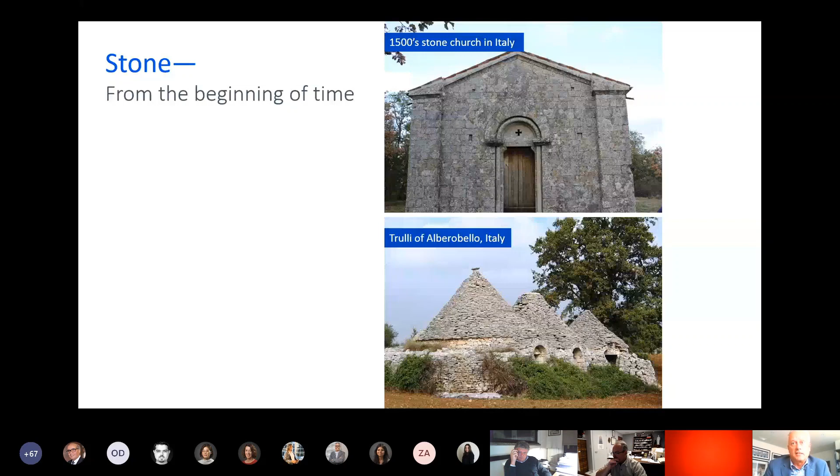With the advent of technology now and CNC and robotics, architects can get a lot more creative with the use of stone as a facade, where it's now, rather than just a building material, it becomes just a decoration on the facade and the main line of defense for weather in mostly rain screen principles now.

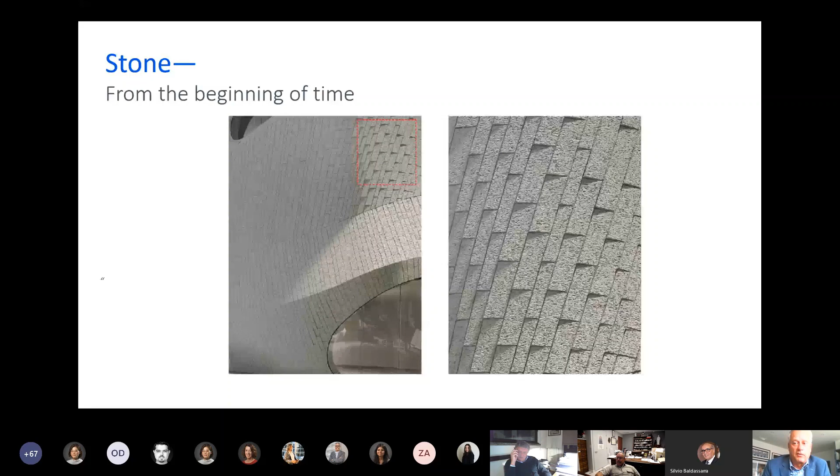So just the way things have changed over time and evolved, and later on we can even get into some of the technology changes with Roberto and Brett and how that's really changed the industry with time. So today, as I mentioned, Brett Rugo is the founder of Rugo Stone, and we've worked on many projects with them. Roberto Canali is a quarry owner and fabricator in Italy, and again, we've crossed paths on many projects over the years, so I'm really glad that they were able to join us today.

A little bit about me. I've been in the stone industry pretty much all my life. I graduated as an engineer, and my first job was with a structural engineer, but we were servicing stone contractors. I then got hired by one of the stone contractors as their in-house engineer, and since then have been engaged and love the industry and have touched many points of it, and feel very fortunate to have worked on some great projects, which I'll share with you today.

Being born and raised in Toronto, I still play hockey, so that's a big part of my life too. A couple of times a week, I put the skates on and go out with the boys and play hockey.

So today, we're going to talk a little bit about design assist and the importance of that, especially on higher profile projects. Cladding types. I'm going to cover topics that I call getting it right the first time, which covers various aspects and approaches. Other things to consider, testing and projects. And throughout the whole presentation, I'm going to be weaving in project examples to talk about the various aspects. So right out of the gate, I think design assist is something that's becoming a lot more prominent.

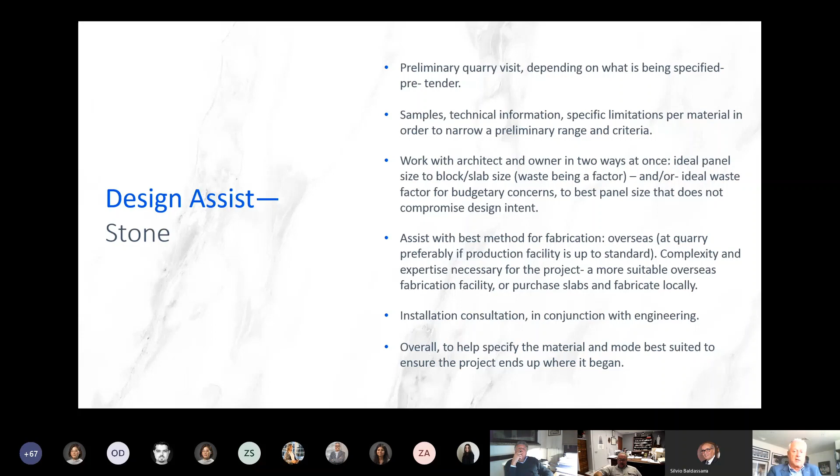It could involve inspections during the fabrication, dry lays, vetting the tickets, fabrication. It could also include shipping, logistics, numbering of stones, making sure the stone is shipped to the site in the sequence that it's required. We have been on projects where we're told the stone's on site. Yeah, the stone's on site, but it might be all the second floor stone. You don't have the first floor stone. So again, understanding all the logistics.

And when you're assembling a team early on, contractors like Brett that have been in it all their life, quarry owners like Roberto, these are all things that automatically come out in the process, but you're not always working with experienced people like that, and some of these things get slipped through. So really assembling a good team at the beginning is extremely important.

What's becoming really popular now is dry lays and digital dry lays, where quarries and fabricators are photo documenting all the slabs that are being produced. And here's an example. You can actually lay out the materials on your elevations and do a digital dry lay. So this would be photographed, develop the elevations on the drawings, cut the pieces, dry lay them, ensure everything's right in the warehouse before shipping and packaging, numbering all the stones appropriately, and shipping out.

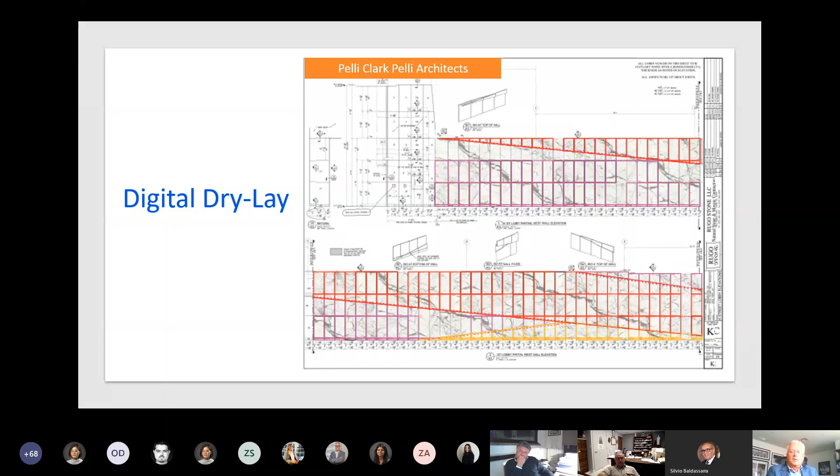So you can see how all that planning, organizing, selecting blocks, selecting the slabs, numbering the slabs sequentially, in order to achieve this goal, needs to be all done up front. And really all the stakeholders need to be part of that process in order to pull it off and execute it properly.

So when I look at stone in the initial stages of a job, really assisting architects in the takeoff, I like to break it up into two categories when we're talking about natural stone. Dimension cut stone, which is really the focus of the presentation today, is custom cut stone shaped and fabricated specifically to go in a location, which requires shop drawings, engineering, shop tickets, most often installed mechanically with anchors. So in other words, we're building a Lego set of drawings, every piece numbered, every piece goes in its specific location.

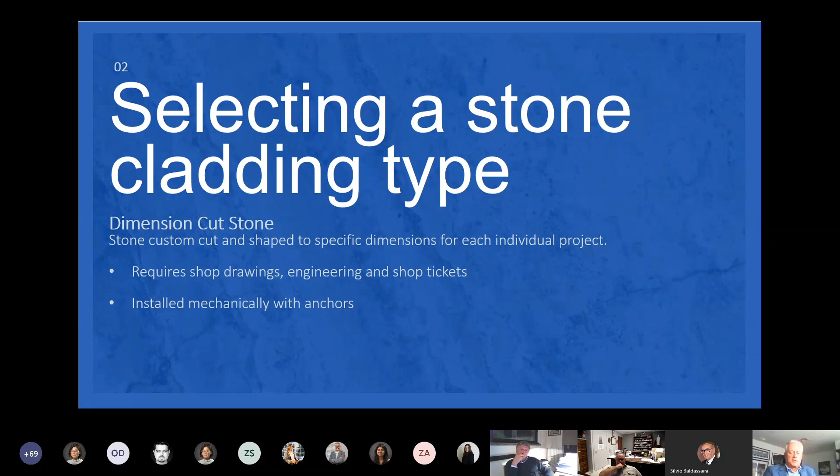Another natural stone type is random ashlar, which is still a natural building material, still used a lot. It typically doesn't require shop drawings. In some cases it may require shop drawings for accent stones or window surrounds, but in most of these cases it's laid up very similar to a masonry type installation or brick laid up in mortar.

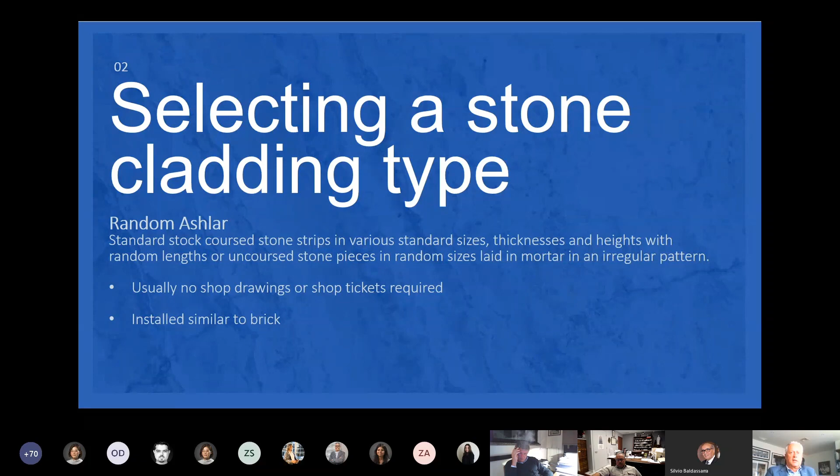Key factors to getting it right the first time. So 5 main things. Material selection obviously is number 1. Structural backup can have a huge impact. Shop drawings, anchor design and anchors. I'm going to go through each one of these individually.

So material selection. First thing, is the material selected suitable for the intended application? Obviously climate plays a big impact. Where is the project? Is it exposed to the elements? What kind of wind loads? Are we dealing with seismic loads? All these factors come into play.

Stone is a natural material. It's not like we can order 35 MPa concrete and we get 35 MPa concrete all the time and we know what we're dealing with. Natural stone is a very variable material. The same natural stone can even vary within a quarry depending on what ledges it's taken from, especially limestones can vary quite a bit in strength. So really, is the material that we're specifying the right material for the application?

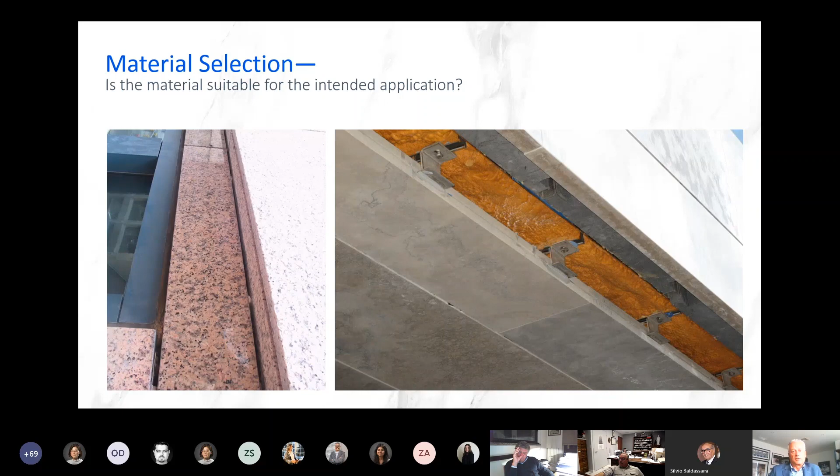I always tell architects there's no bad stone as long as it's used in the right location. There's stones that can be used improperly in exterior cladding or on paving that could have terrible results. But if they're used on an interior or a lobby on an interior facade, perfectly fine. So material selection and suitability, very, very important.

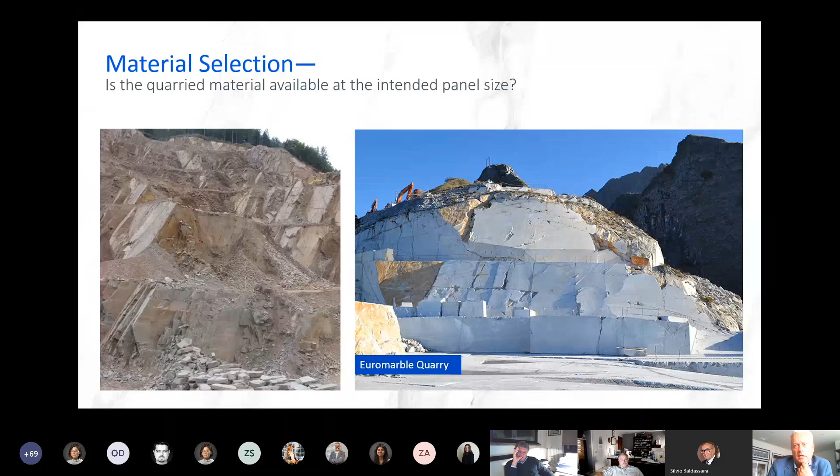The other thing is, is the material quarried available in the specified size that you'd like to use on the project? On the left, you can see a quarry. This is a slate material. Actually, I think it's a basaltina, maybe. I'm not quite sure. I can't remember exactly. But you can see on the right side, one of the Euromarble quarries here, you can extract very large blocks, and I've got some other examples of that.

If the panel size is extremely important, you might have to change your initial material selection to go to something else. If the material that you're dealing with is the important aspect, then maybe panel size changes and your jointing patterns change. So there's various ways to deal with it, depending on what the importance of the job is.

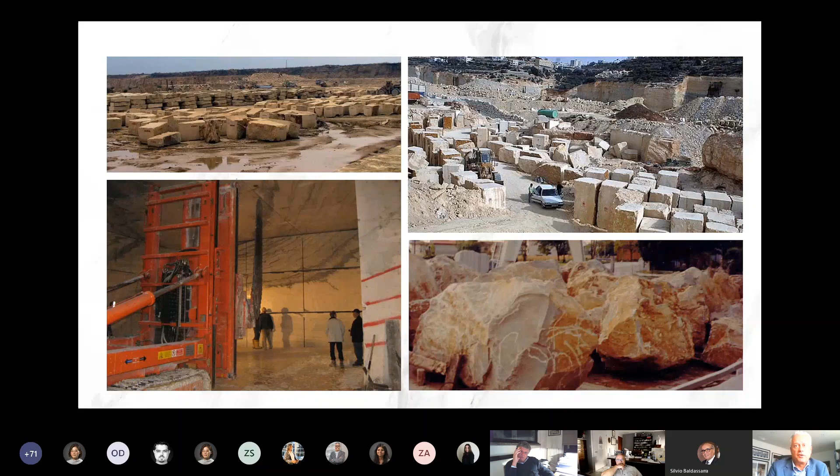I'd like to show you a few little slides here that show you some of the quarrying methods. And this is a video of a large block being extracted at the Botticino quarry in Italy. And I'll just run a short video here of it.

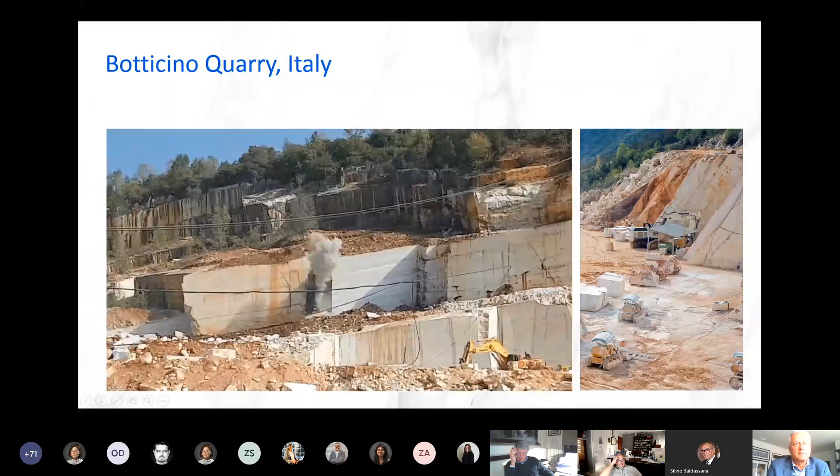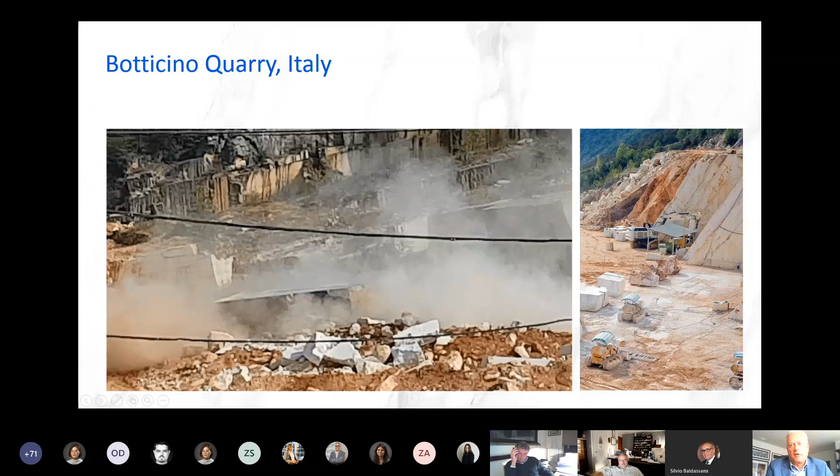So that's one method where they make certain cuts and then they blast it off the wall. So that's one example. And in most cases, they allow the blocks to fall off the bed ledge or drop down. Several reasons for doing that. If there's any natural fissures in the stone, they're gonna show up when the main blocks get dropped very often. So again, various methods. I'll show you on the next slide.

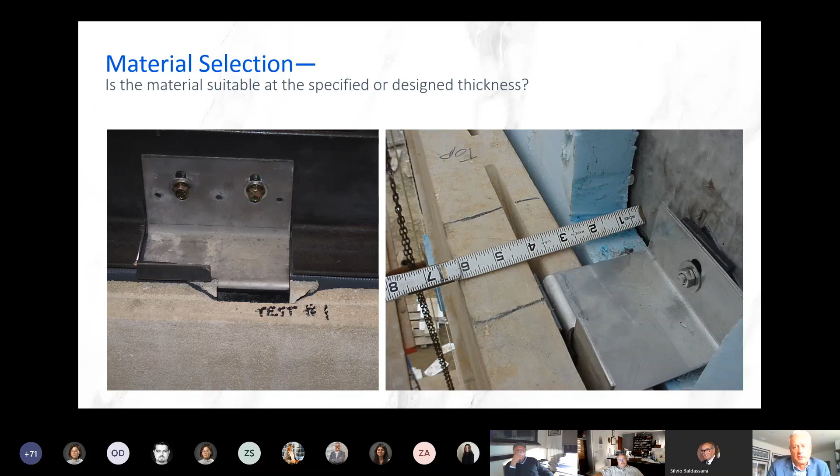The other reason for getting involved with the appropriate stakeholders, depending on the project: are they capable of producing to the quality required? Can they deliver at the quantity required? On larger projects, sometimes quantity and delivery is important. Technology and availability of technology varies greatly depending on who you're dealing with and what parts of the world you're dealing with. So understanding that is also very important. Again, a big part of the QC control of the project.

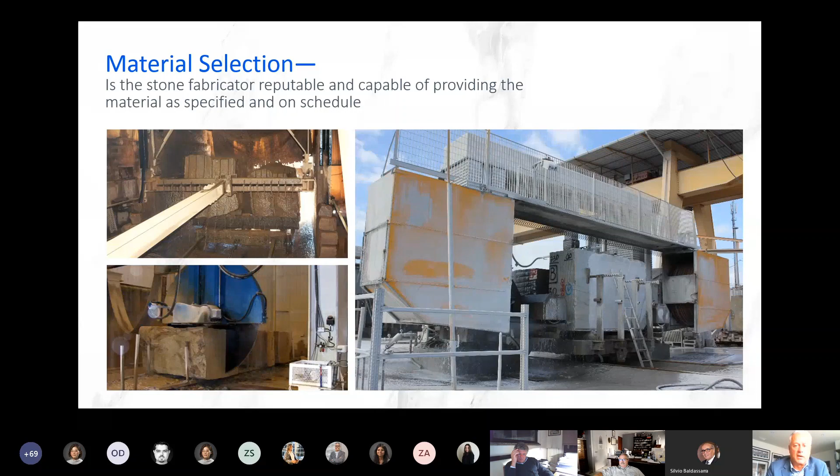Testing, current test material. We get very often historic test materials sent to us. And as I said, as the material gets quarried in the mountain, there are some materials that are very, very consistent, others are not. So really having current test material is very important for cladding projects or projects of some importance. If we're dealing with a wainscoting in a lobby, not important.

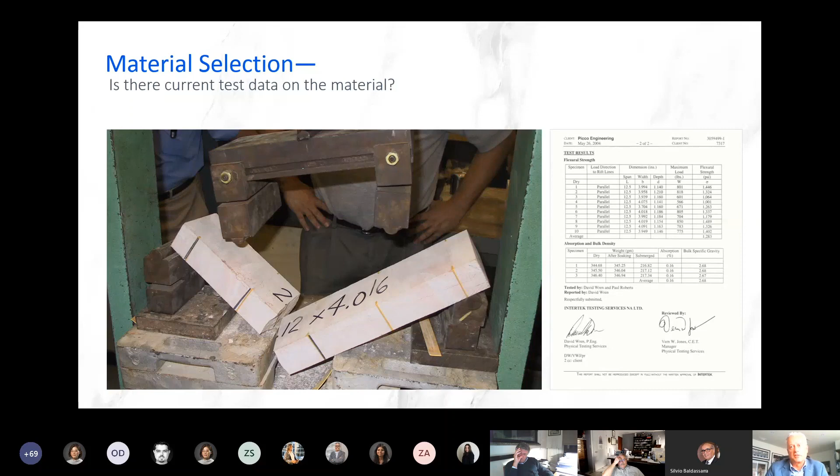But if we're dealing with soffits at a main entrance of a building and cladding on commercial, institutional buildings, it becomes very important. The level of testing, again, is really predicated on the nature of the project, and testing can be very, very simple, or it can get very, very complex. And I'll even show you some large-scale mock-up testing a little bit later on.

But testing the anchors, testing panel strength, what we call an airbag test, where we actually simulate wind loads or seismic loads, lateral loads on the panel by having an airbag, anchoring the stone into it and actually testing it to failure. So we understand where the failure mechanisms are within the assembly, whether it's the anchors or the panel itself failing.

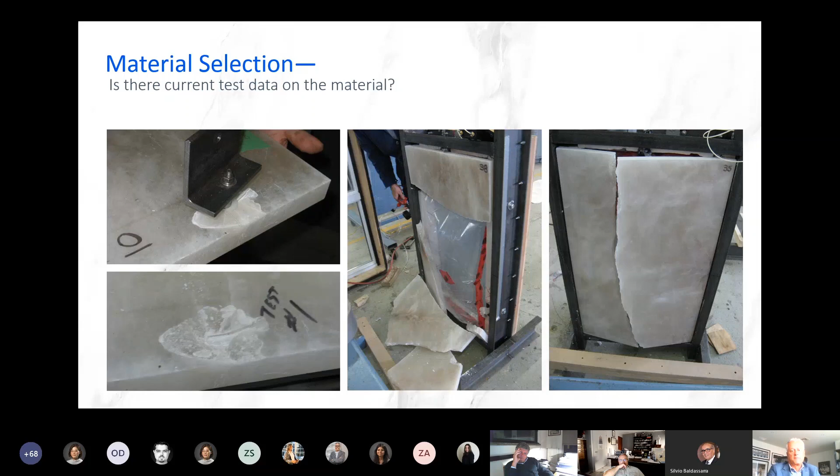Structural backup, again, having some say in that and working with the structural consultants can really have a huge impact on cost and ease of installation. Obviously a concrete or masonry backup wall is preferred because you have unlimited places to locate your anchors, but it may not be the most efficient from a thermal perspective. So steel subframes or aluminum subframes become an option sometimes.

Metal studs we're dealing with a lot because it's a cheap building material. But when we're mechanically anchoring stones to metal studs, there's a lot of other complexities that could come into play. If they're addressed early on, again, we can integrate a lot of that into the structure to facilitate some of the anchoring requirements later.

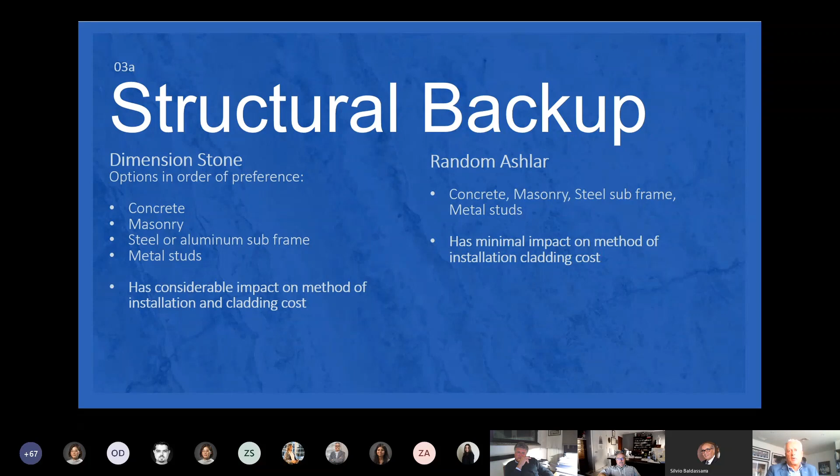When we're dealing with random ashlar, again, not as much of an impact because it's laid up similar to a brick. So as long as you've got bearing or shelf angles, the tie back is usually by mortar adhesion. So a lot less of an impact.

Shop drawings become a big part of the process. Clear shop drawings will obviously give the architects and designer a clear understanding of exactly what's happening with the job. Shop drawings should include all the interface of all the adjacent materials and how the stone's going to interact with adjacent curtain wall or flashings or whatever. So that can all be vetted out early.

Make sure there's no conflict with connections or anchor details that may impact flashing or details that may conflict with other trades. So the shop drawings really should be an integrated process of all the associated trades really interacting with each other and making sure that sequence of installation is also addressed.

Who needs to go first? Is the curtain wall going to limit our access to a connection that's critical? So do I need to go in before the curtain wall contractor, or do I need to modify the anchors to facilitate the curtain wall contractor? So sequence of who goes first becomes very critical.

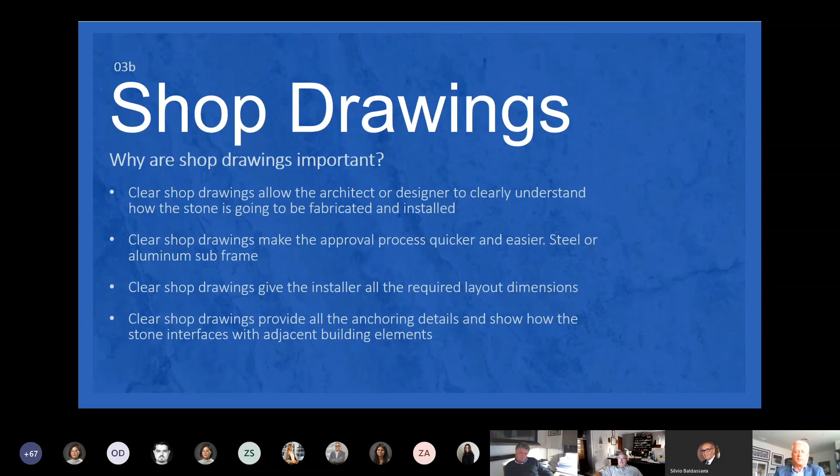Very often as well. So I'll show you a few. We were fortunate to work on the Barnes Foundation building in Philadelphia, and this was a concrete structure, and the architect designed these panels with windows integrated in and some slots with reveals. Some of them were windows, some of them had backlighting.

So we looked at several different options here on how to approach this. We looked at potentially pre-panelizing it, creating panels offsite and coming in and almost installing this like a precast installation. But working with the installation contractor, they preferred to do site installation and hand set the stone. So it was a rather large project, and what we did is broke it down into a bunch of little sections. Here's an excerpt from zone 25, which is this part of the building here.

So you can see that it's somewhat of a random panel sizes. Again, the panel sizes were driven by the block size availability. So in order to minimize the waste of the material being quarried, the architects worked very closely with the material supplier in order to develop a jointing pattern where we used almost all the material with very little waste. So again, you can see how heights and widths have varied in the different panels in order to create this random pattern to utilize the block sizes available.

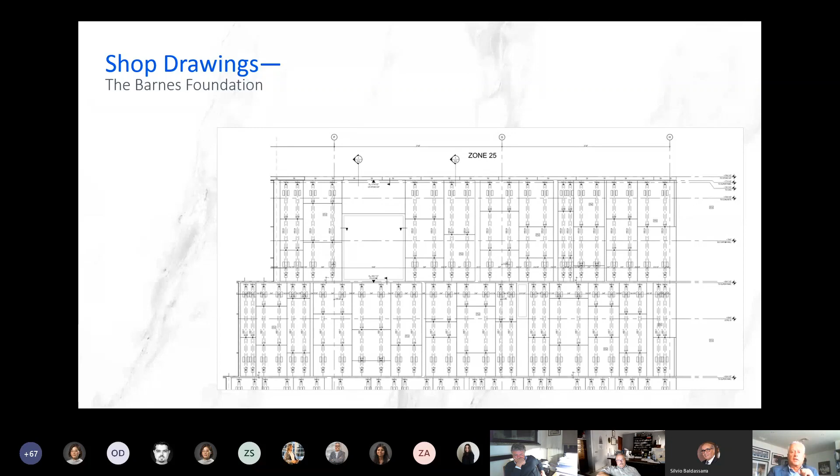We developed an anchoring system that came all outside the insulation, so all the tubes were exterior of the insulation in order to keep the integrity of that, minimize the amount of thermal penetrations through the insulation. So that's why we designed the tube with only 2 penetrations, top and bottom, through the insulation. So here we can see a very simple, easy to fabricate solution. You can see how the tubes are offset to allow for the insulation to run in behind them, and then the stone was proud of that.

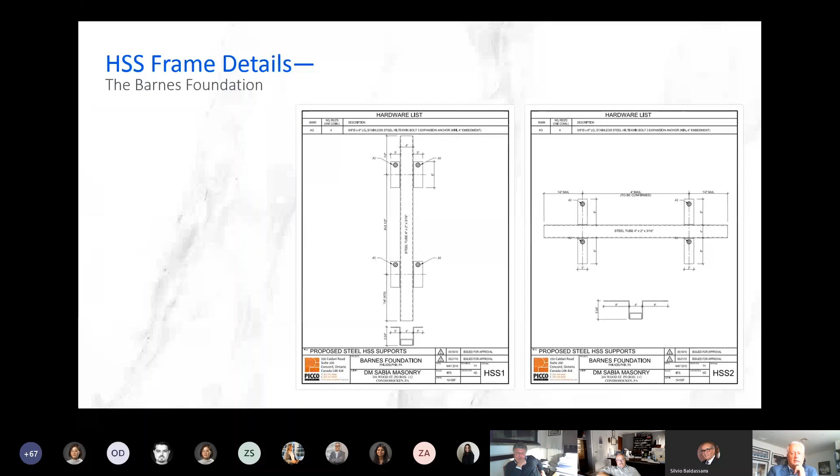And when we talk about shop drawings, depending on who the stakeholder is that's doing the shop drawings or contracted to do the shop drawings, if a material supplier is supplying the material and is not responsible for the installation that's coming downstream, we often get drawings like this in order to do our engineering with. So really, you look at this detail at the top here, and the stone is all detailed properly, it's all dimensioned, everything's clear on the stone fabrication, but we have nothing on the structure behind.

So in order for us to do the engineering in a set of drawings like this, we basically have to go in now and extract from the structural and architectural drawings what is the structure behind here to anchor to. So when specifying your shop drawing requirements, make sure that all the structural elements associated with the stone anchoring and the adjacent building materials are part of that specification, part of the requirements of the shop drawings. It just makes everybody's life so much easier downstream if that's addressed early on in the process and becomes part of the shop drawing development process.

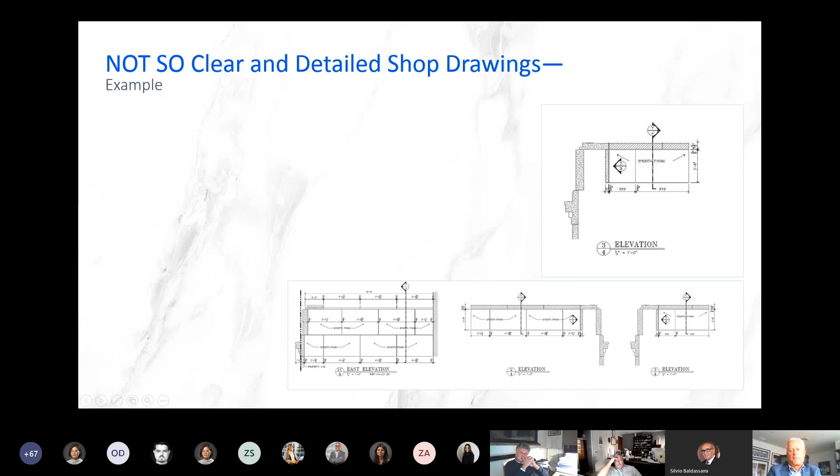Anchor design with dimension cut stone. There are some proprietary rail systems out there, some what they call standard connections out there. But in essence, every job is custom designed. We have stones with different properties. We have different climate conditions, whether it's wind, seismic, thermal, freeze-thaw environments, non-freeze-thaw environments. We have different cavity sizes to deal with. We have different structure to tie back to. So really to try and standardize anchors becomes almost impossible.

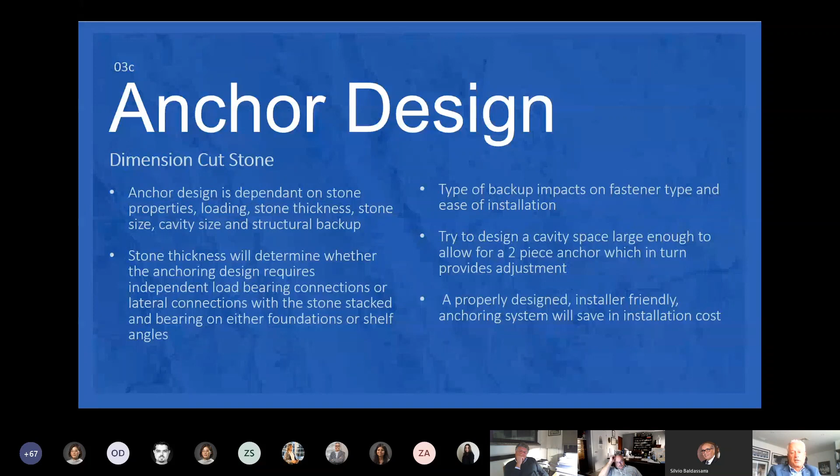So for the most part, anchors are custom designed. They may be variations of very similar anchors, but they're all engineered for each specific project. With some of the larger stones that are stacked or stones that are set in mortar adhesion, it's a little less critical. But on custom cut stones, all the anchors are engineered, and that should also be in the specification, that they should be engineered and detailed by an experienced cladding engineer wherever your project is.

Again, as I mentioned, in random ashlar, very often off-the-shelf type, almost brick tie type anchors are suitable in those, although sometimes we will still design some strap anchors with some mechanical engagement into the stone as well.

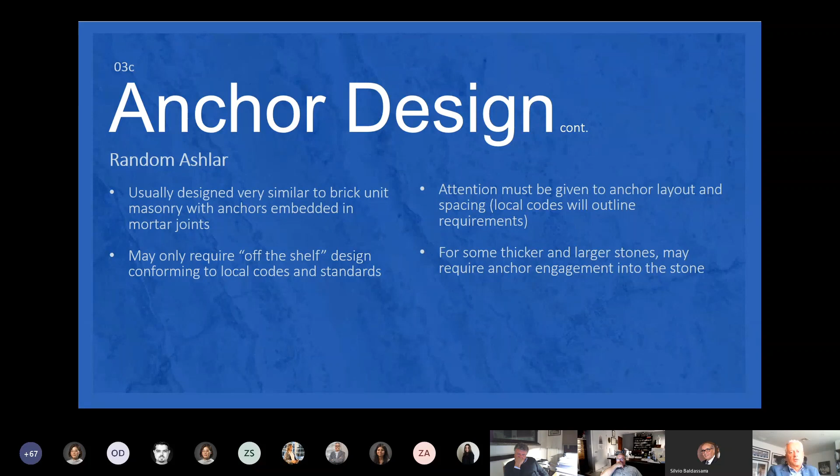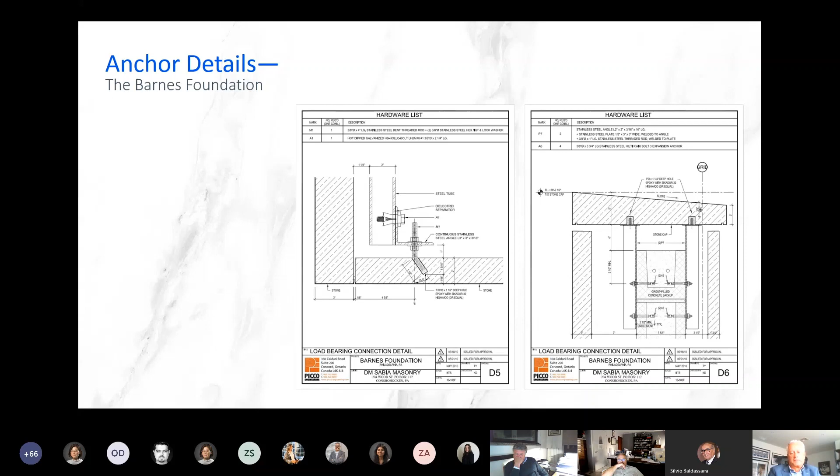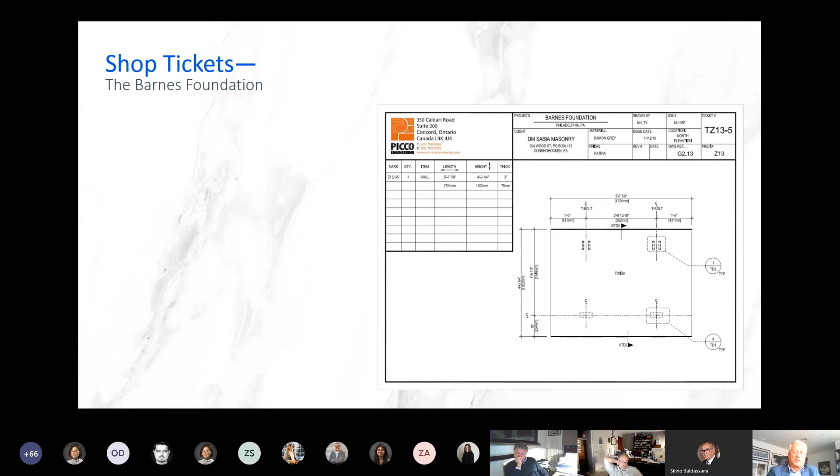And here are some of the details that are required for saw cuts, pocket slots here. Again, kerfs with rabbets because it was a tight joint, so we need to rebate the stone in order to receive the anchor and still allow for a tight joint or a small joint there. These are what we call TD1s or T-bolts, which are slots like this that a rod with a little tapered metal plate goes in order to anchor stones. So again, various standard trade details that fabricators would be very familiar with.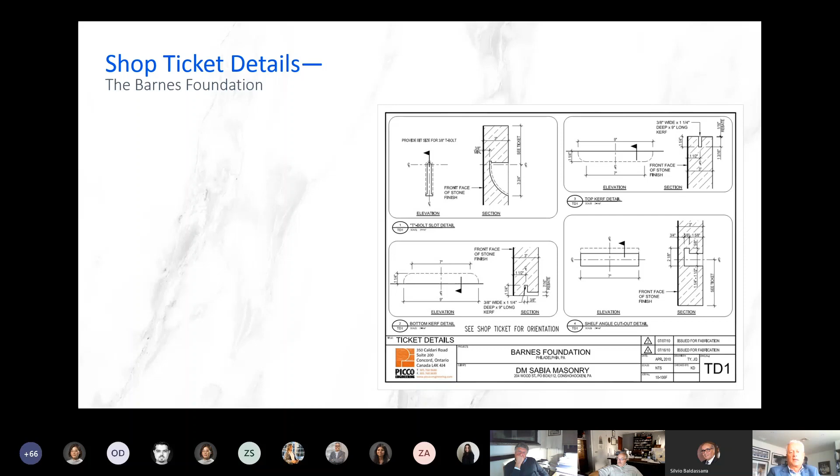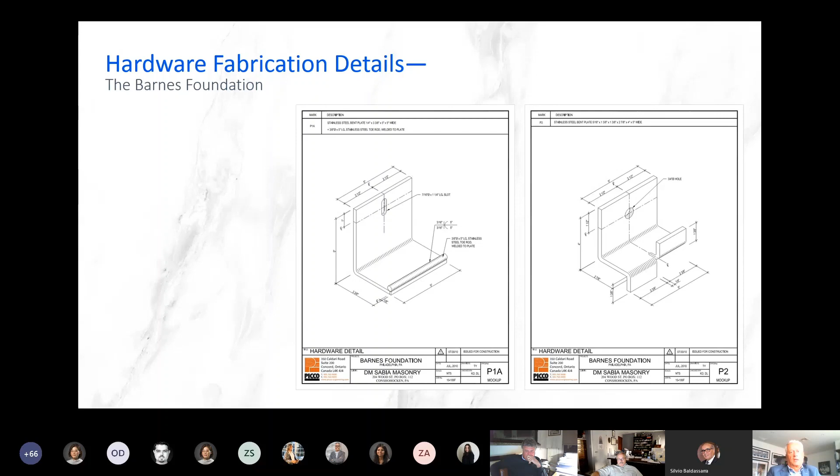Same way we do shop tickets for the stone, all the anchor details get detailed, they get numbered, they get tagged, and they all have their specific location on the building. Because cavity spaces vary, stone sizes vary, these plates may vary depending on where they go on the building. And then, in order to facilitate ordering of all the plates, a quantity takeoff and a listing of all the hardware plates required for the job is usually developed, and the installer is usually responsible for that.

And very often they won't order all the hardware unless they have the availability to do a site survey before, because site conditions sometimes require that certain anchors be ordered longer or shorter, because we all know that the structure is never really where it's shown on the drawing. Although we as an industry have been trying to push hard on some of the trades out there and even specifications to tighten up on the tolerances on the building structure itself.

Because some of the things we're seeing out there now, a 4-inch cavity or a 5-inch cavity could be anywhere from 7 inches to 3 inches. And the tolerance in structure seems to be going awry. And it's left to people like Brett to deal with it on the job site. And, you know, additional costs, additional surveys, additional delays, ordering custom hardware, all because the structure is not really adhering to their code limitations on tolerances.

And it seems to be more and more accepted that they can do that, but the stone has to be set where it needs to be set. So as an industry, we're trying to push back a little bit on that, not with a lot of success, but it's something that we're finding more and more challenging because we can only build in so much tolerance in the initial design. So something we're working on.

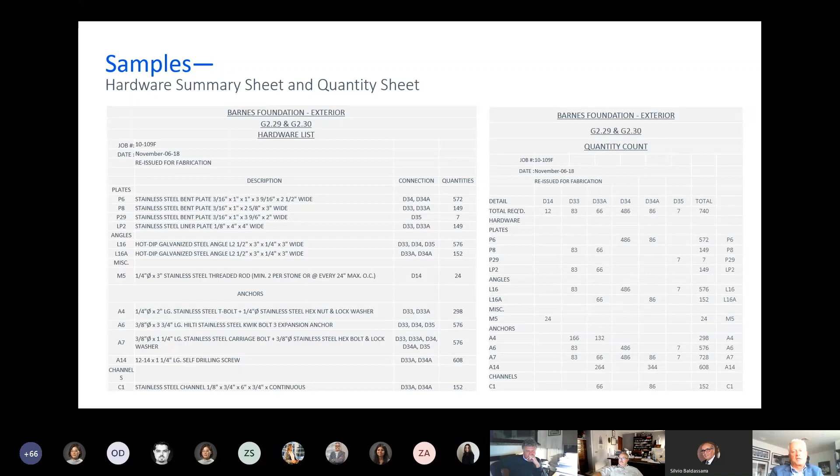And we very often have to fight with the building departments because they're not familiar with that. They're not comfortable with that. So we often have to fight to get through it. And, you know, we take responsibility, we design it. And we very often show them examples of 500-year-old buildings in Europe with columns supporting very large structures above, and there's no steel in them.

So we usually design connections with slots, Teflon plates, or similar to bridge connections that allow some movement between the structure and the column, so we don't induce lateral loads on the columns, but basically support vertical loads. So there needs to be some design in the approach. So the roof structure would be designed as a diaphragm tied back to the structure, and then allows for some movement between the steel structure and the stone. And we've done that on quite a few projects successfully now.

We're actually at Belmont University right now doing a similar application where all of the main columns on all the gables are all structural, and we're bearing the steel structure on the stone columns.

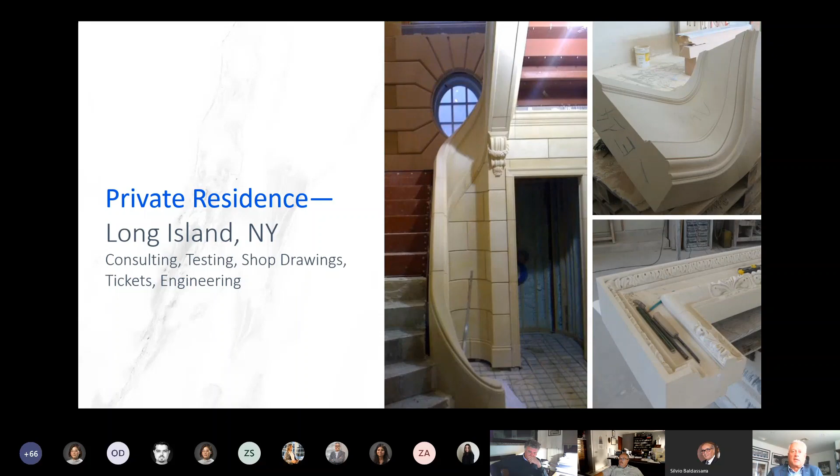So it was craned in from the exterior into one of the courtyards at the Academia in Florence and installed in one night. So again, that was a fun project to work on, and it was made from the same Carrara material as the actual Statue of David, quarried in the same area.

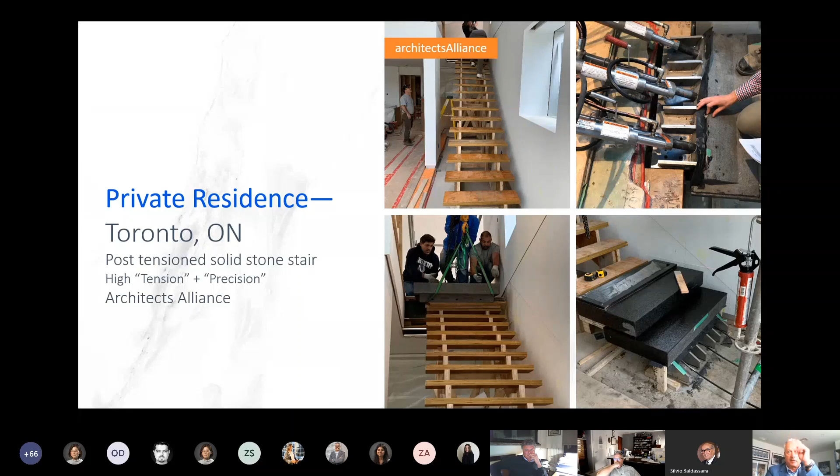So we said, why don't we just build a structural stone stair? We don't need it cantilevered. We'll pull it off the wall and we'll design a self-supporting stair to span top to bottom. So we developed some details on this. We ran 3 post-tension cables up the stair. And so we built a temporary support. Everything was shimmed off the temporary support for installation. At the end, we post-tensioned all the stairs.

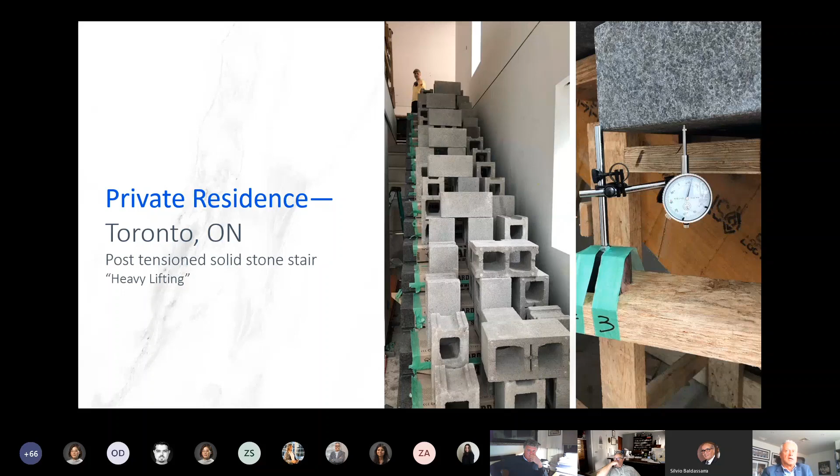We took all the shims out of the structure and we load tested it to 2 times the design load, measured deflections at 3 points on the stair, and we had 1.5 millimeter of deflection after we loaded it with all those masonry steps. And here's a section of the stair, and you can see here we've nested each little stone into each other, which is hogged out in the middle, which you don't see anywhere, but that created a perpendicular line that we could run the cables right through.

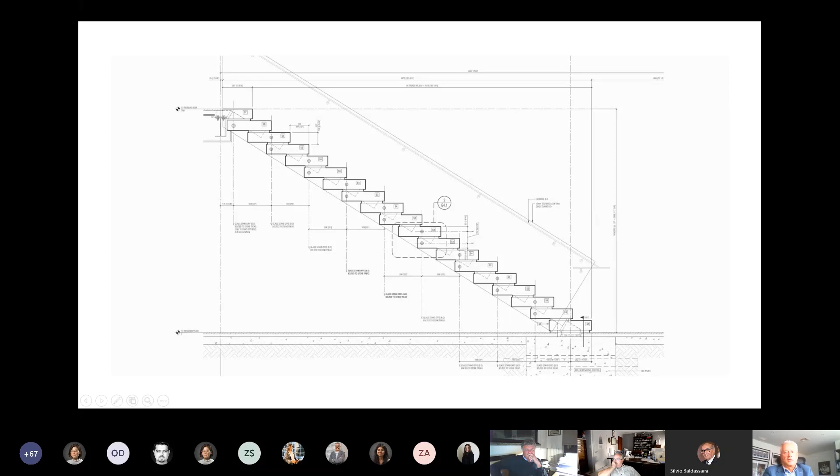So again, fabrication became really critical because these holes had to all align in order for the cables to run top to bottom. So there's a section of our stair, and there is the completed installation of that stair. No steel, no structure, nothing but stone, and 3 embedded post-tension cables is all that's used to support that stair.

And we're looking at a lot of different projects that are going to utilize this technology now, even curved traditional type stairs with running cables through them. So rather than building a big structure and trying to clad everything later, we're building solid cubic stairs and using them as the structure, running post-tension cables through it, and none of the steel is exposed. So just sharing some of the newer technologies that we're exploring.

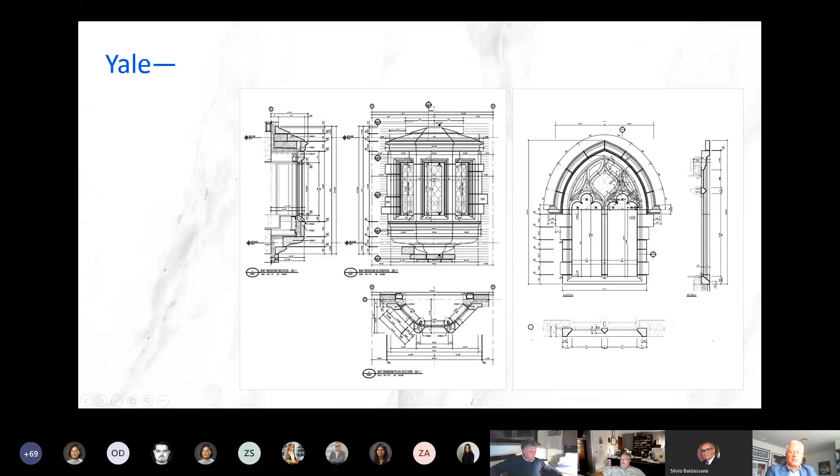Here's another example here where the original structure had steel columns on each side of this doorway, a steel beam running across, and everything clad in stone. And we said, why don't we just build a stone arch? Get rid of all the steel, let us build a stone arch. It's way simpler. It makes the installation easier. Yes, there's more stone involved, but net it was a huge cost saving on the project.

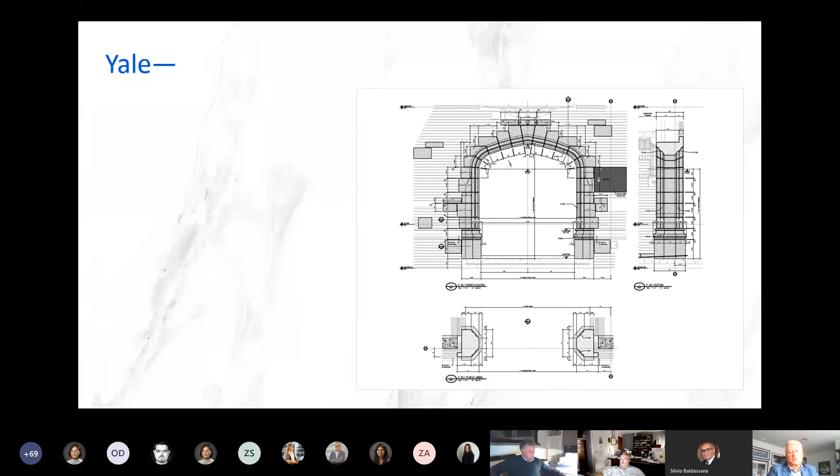So we got rid of all the steel, designed a structural arch, picked up all the stone above there on a true stone arch, and then we started with shelf angles from the second floor up and started bearing the stone above there. Again, being able to drive some of these decisions early on is really beneficial.

When we talk about anchors, we're always specifying 300 series anchors. So anything in contact with stone, we like to use stainless steel in order to minimize any potential for corrosion, rusting, staining. We can integrate galvanized steel as backup anchors. So when we're designing framing or anything behind the stone, the only thing is when we're transitioning from stainless to galvanized, we need to separate with a dielectric separator because they're incompatible materials, especially in moist environments.

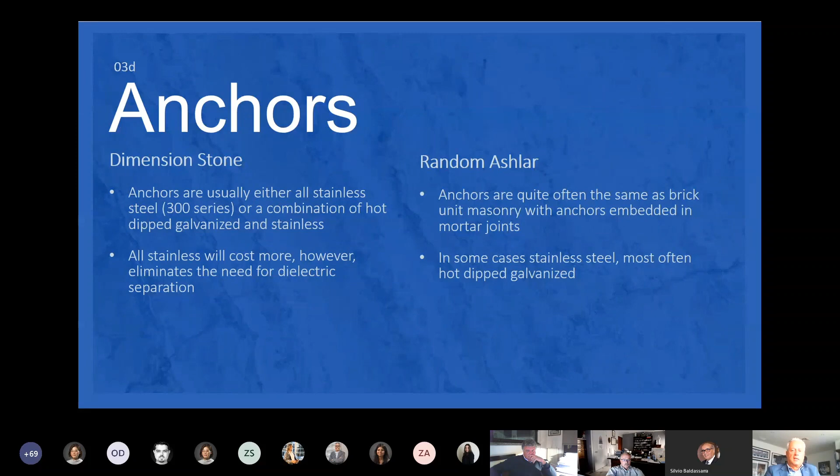So it becomes not a complexity, but something that needs to be ensured that's followed on the job site. So very often, if possible, we like to drive an all stainless solution, so it eliminates the need for dielectric separation. So, dumbing it down to very, very simple, typical type of anchor details. This is a typical what we call two-piece pin connection, an angle, a plate, a bolt, slotted connection allows for in and out, vertical slot allows for up and down, so it gives the installer some adjustability.

Typically insulation is run through there, so there's a pocket cut out in the insulation, the angle gets installed, the insulation gets either fit back in or foamed in and taped depending on the type of insulation, but you're creating a small thermal bridge going through there. Depending on the nature of the project, LEED requirements and thermal requirements, you could have a thermal break behind the angle that creates a little bit of a break on that thermal bridge.

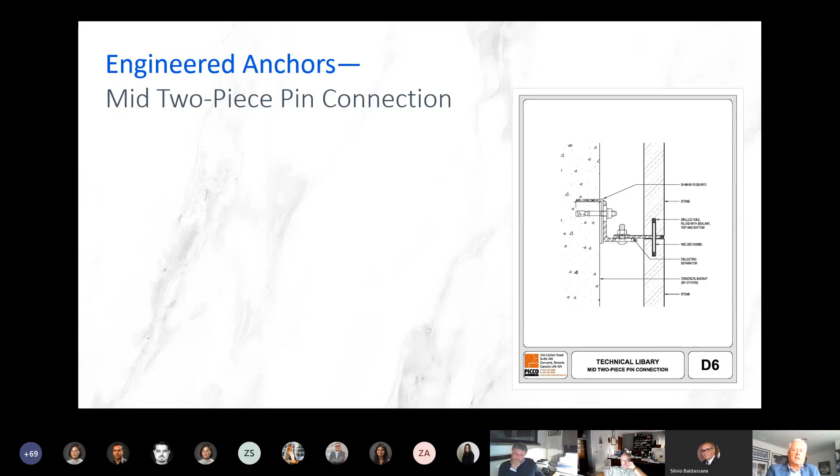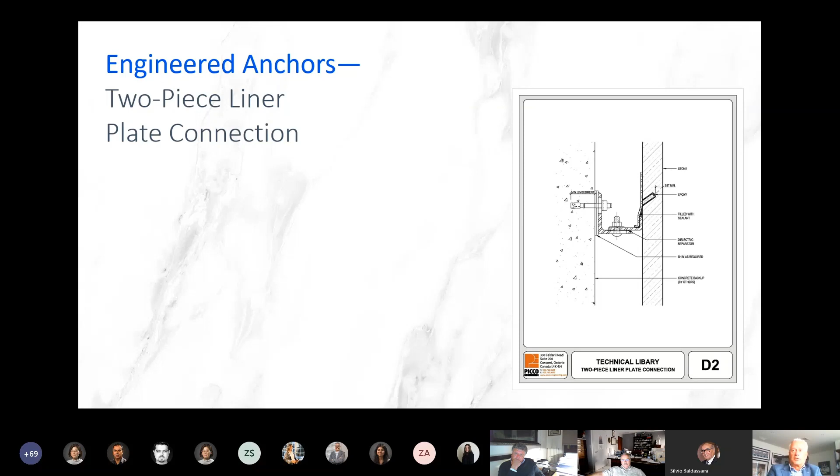Sometimes the plates are separated to break the thermal bridge. So there, again, various ways to deal with thermal bridging depending on the installation type. Here's what we call another blind type connection, which is a blind anchor again, which we try and avoid as much as possible because the installers don't like them and they become a little trickier to deal with.

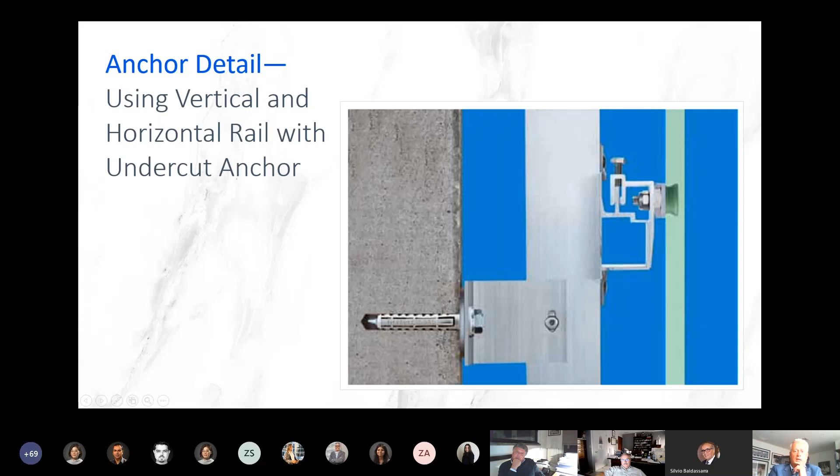There's a lot of proprietary rail systems now that are becoming a lot more prominent. So the vertical and horizontal rails become your adjustability, and then the anchors go in and set in place. This is kind of showing how a back anchor is set in there. This is a very thin actually glass panel, but similar type of systems could be used for stone as well. And when you look at the back, you've kind of got these verticals to the structure, horizontals depending on your jointing patterns, and then the panels come in with these clips and just clip into the rail systems. And again, there's a number of these on the market right now.

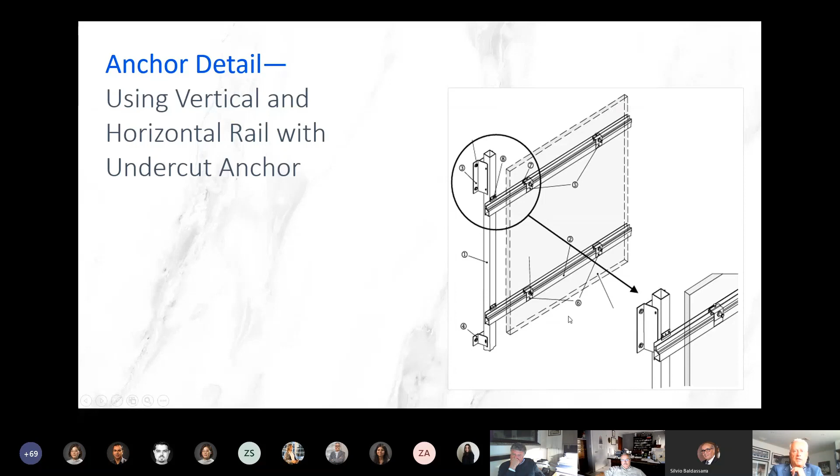Here's one that actually Brett and I are working on with a project in Washington, D.C. right now with a very similar installation to this one, where it's almost like a curtain wall. So we're spanning main structure floor to floor with these vertical aluminum sections. Insulation is integrated right into the panel system, and then all the anchors are proud of that. So it's a fully integrated wall system that encompasses air, vapor, insulation, and the panels themselves. So fully integrated system. It's going quite well. Brett's in the middle of that project right now. Maybe we can speak a little bit about that after as well.

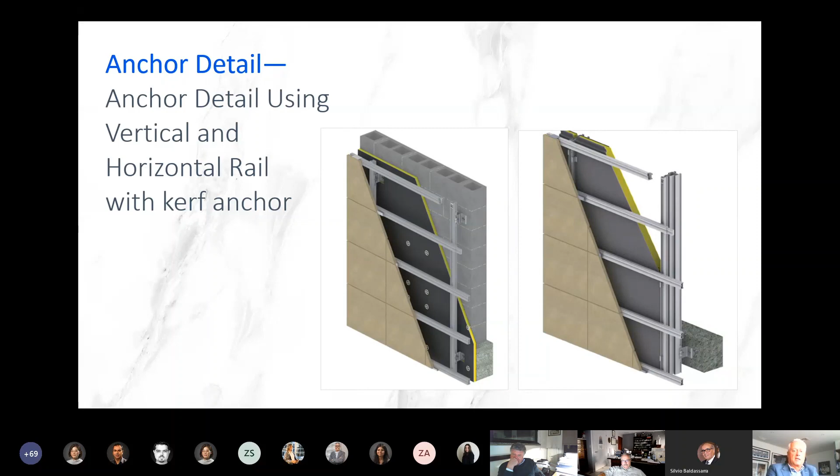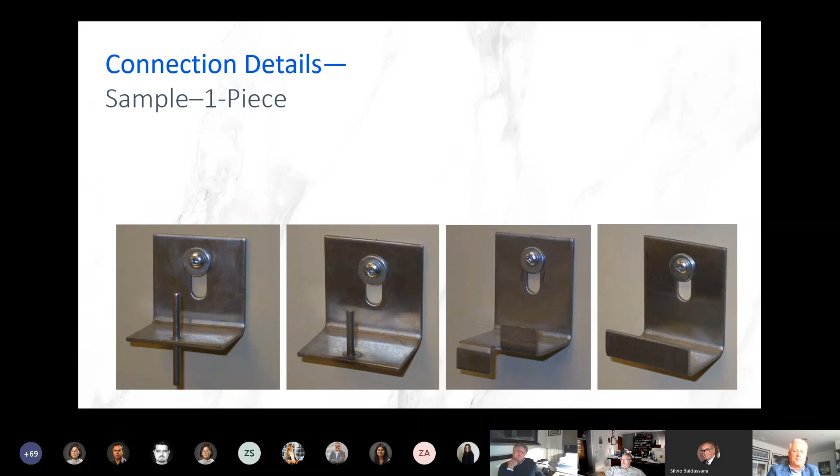One-piece connections. These are very often used in lobbies, in interior applications, light applications, also exterior, but they're lighter type of anchors. Here are again two-piece connections where we create slots to give adjustment for the installer in case the structure's out. It gives a little more adjustability.

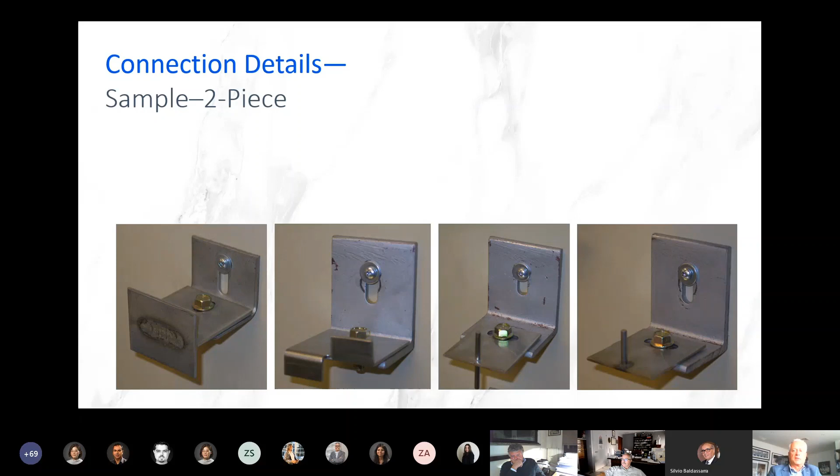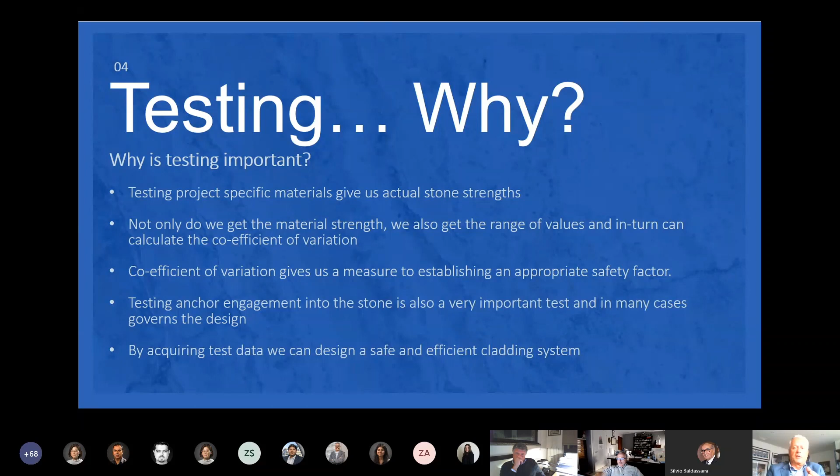So a big thing is testing, and we often get historical testing, and again, depending, you see some of the nature of the projects we're dealing with, we want to really know the material properties that we're dealing with. You know, various stone materials, various coefficients of variation, various environments that we're dealing with. So I want to give you an example of why this is really important. I've got here two examples of materials that may be given to us that are 1,000 psi strength. So the flexural strength's 1,018, and this one's 1,006.

In essence, they're the same strength. Very often all you get is, well, flexural strength's 1,000 psi. Great, we can work with that. When we track all the various test results to give us that average, we can see that this has a coefficient of variation of 7. Now I'm getting a little technical here, and this has a variation of 29. I'm going to demonstrate here what that means.

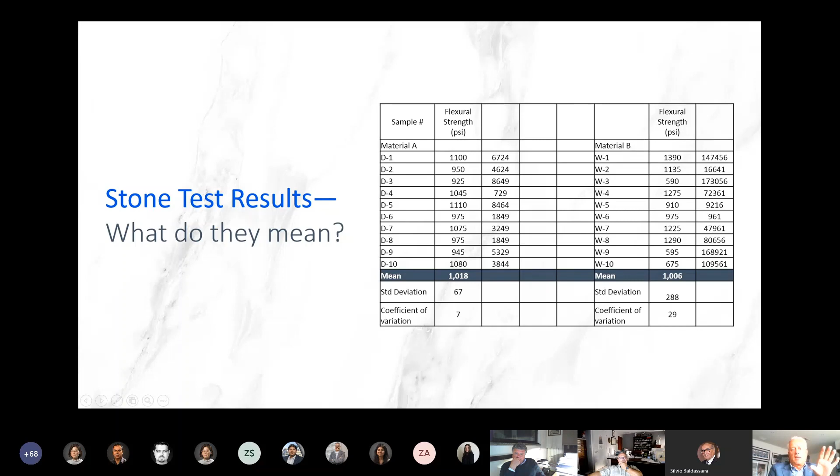The consistent material I can comfortably design to a lower safety factor, a safety factor of 3 in granite, maybe 4 or 5 in limestone. Whereas if I'm dealing with this variable material, which sometimes may be a result of veining in it, maybe a result of different inclusions in the material that could result in those variations, we need to design to higher safety factors in order to design for that variability.

So this is why, from an engineering perspective and a project's perspective, understanding the material at this level is extremely important. So we really push for this, and it's not a big cost item to get flexural strength testing done like this. You're talking about maybe $3,000 to $5,000 on a project. So when we're looking at a cladding job, it's a very, very small price to pay to really understand the material we're dealing with, and very often avoid over design.

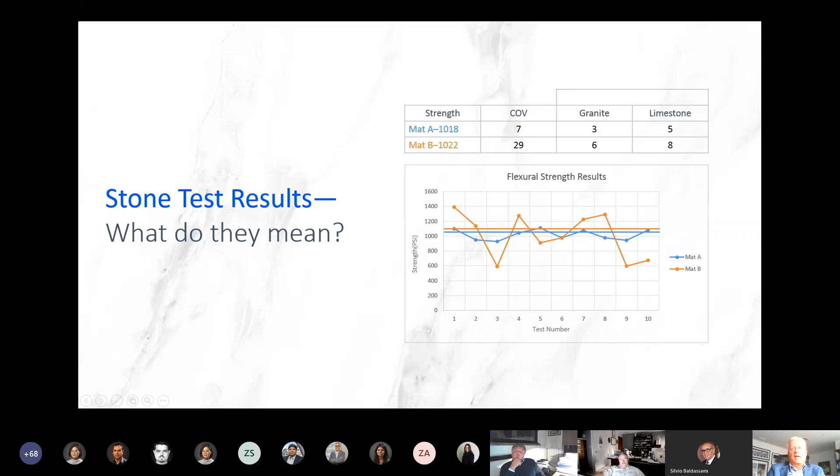So in order to really test that whole system that we were providing, they did air infiltration, water penetration testing. So they created a chamber. Brett and his crew, and actually specifications specify that the crew that's installing on the job site needs to install the mock-up, because they want to really reflect the job conditions as much as possible. So his installation crew that he was planning on using on the project went and installed the mock-up, sealed it all.

They created an airtight chamber, and they actually created a negative pressure in the chamber, and then drove it with water and measured if there were any breaches in the system at all that allowed water or air to go through. They also did smoke tests to see if air was going in. And we did actually find, not with our system, but the curtain wall supplier on the skylights, right along the integration between the stone cladding and the way the flashing was going in, there was a failure there that resulted in a redesign of their connection.

So these mock-ups can be very, very effective. Again, on a small project, you're not going to do a mock-up of this scale, but on larger high-profile projects, trying to create mock-ups that really reflect a lot of the complex interaction of building materials is very critical.

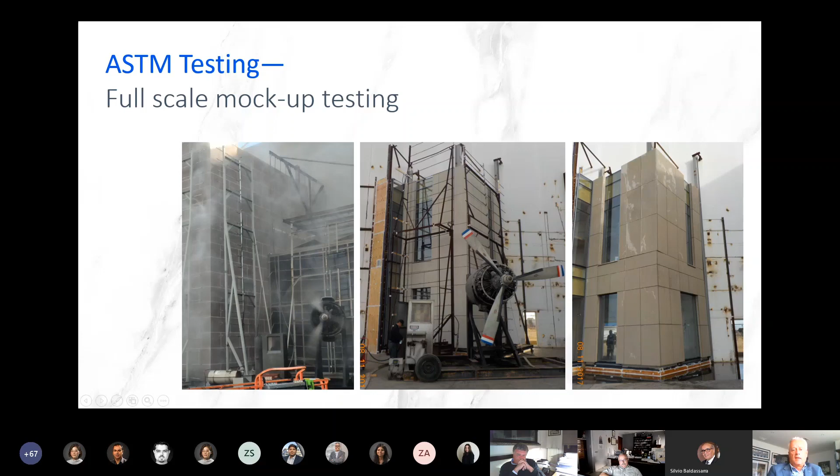Other things to consider. We talked a lot about this during the course. Engaging the right stakeholders, depending on the size and nature of the project, is really important. Bringing a cladding person in very early, engaging the stone detailer, the quarrier, the installer fabricator.

And again, we're doing more and more of this now because it's really proving to be the best and most effective way of approaching projects, because everybody can really have an influence early on with structure, architect, general contractor or construction manager, and really all the stakeholders become part of the process.

Brett was the president of the Natural Stone Institute a few years ago. I'm the current vice president. It's an international organization. Euromarble's a member. And we are driving excellence in the industry, and they do have an accreditation program that pre-qualifies installers and fabricators.

It's a very thorough quality assurance program and metrics that measures and monitors the accredited companies in order to maintain a certain level, and they have various categories. So again, it's not a bad idea to check if your installers are qualified, if they meet the requirements. Do they meet the quality standards that are set by the industry?

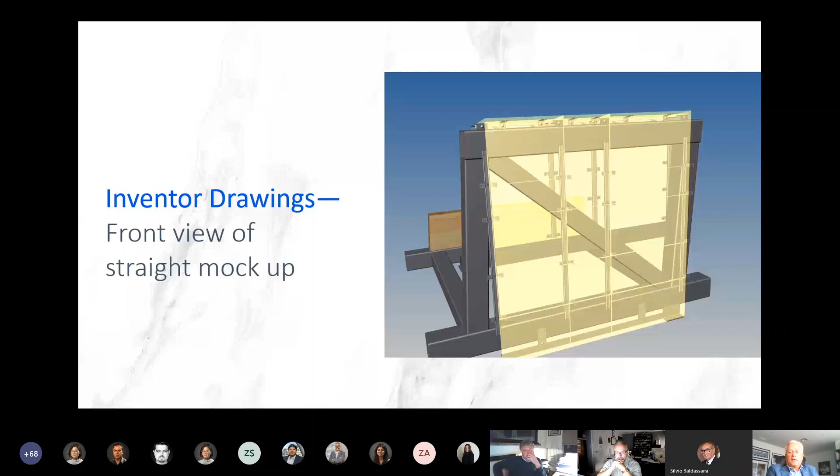Several mock-ups were done to check the backlighting, because these were backlit alabaster. We wanted to check to ensure that the anchors we were designing were not creating shadow lines, and the feasibility of the anchors. Here is the anchor that we actually designed. A very small pin connection offset from the framing in order to allow light to diffuse around the anchors. And it actually was a very effective solution.

Various lights were tested also. And another big part of the design process with the lighting consultants and maintenance people on the building was, how do we change the lights if a light burns out on these ramps, which is inevitable, even though we're using LEDs with long lifespans. That was also part of the process.

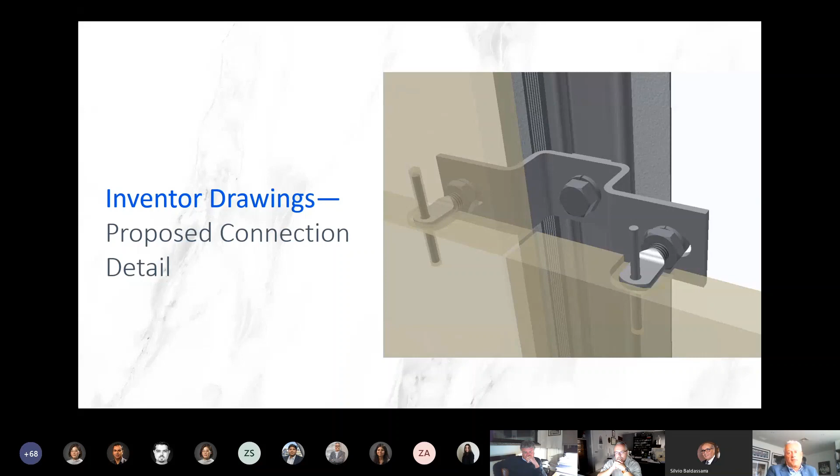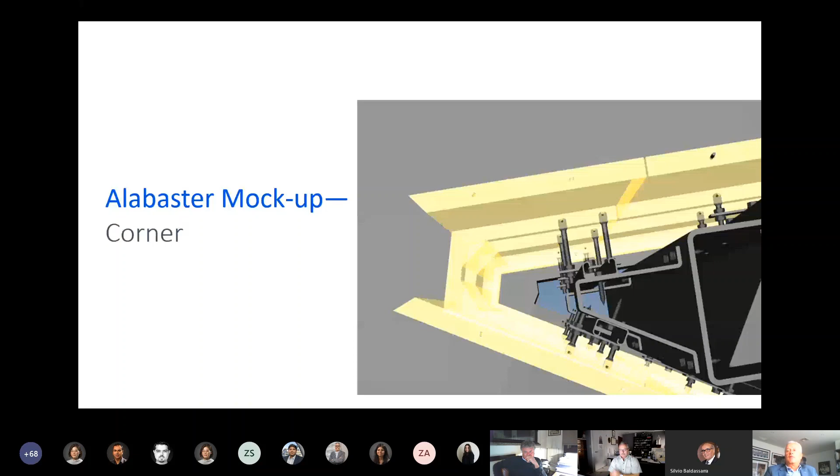There was very complex geometry on some of the corners and how that was all going to work. Here is a plan view of our detail, and there's the actual execution of the connection on the corners. So again, the mock-up allowed us to check, does this really work? Will it work on site? Do we need to make any adjustment? And as it turned out, it was quite effective.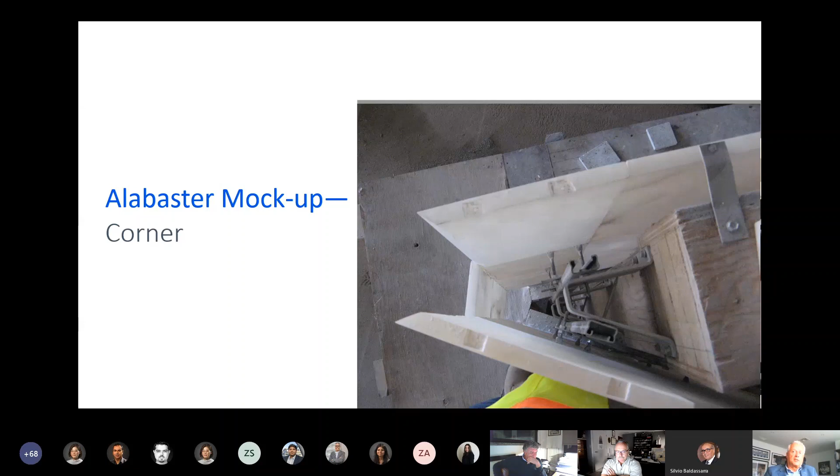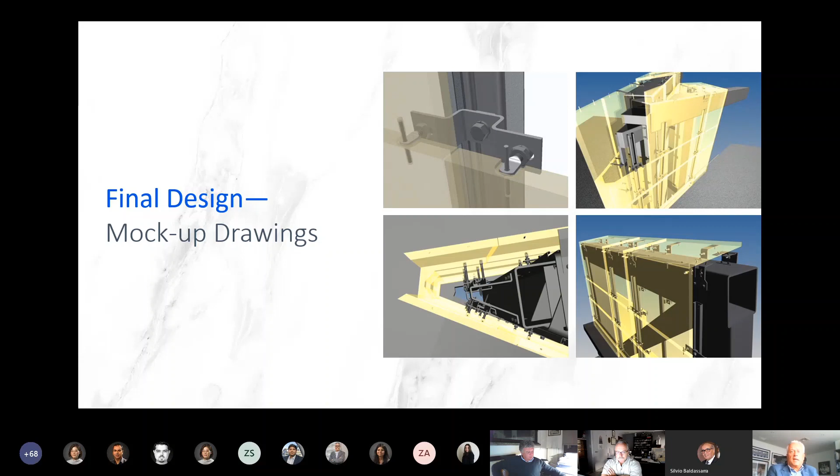So again, when we're looking at some of the challenges, geometry was also obviously a challenge. All the ramps were fully modeled with the structural trusses. We received the models from the steel fabricator, who developed their 3D drawings from the structural engineers. We integrated all our material. The architect actually acted as a hub, so we fed all our various models to them.

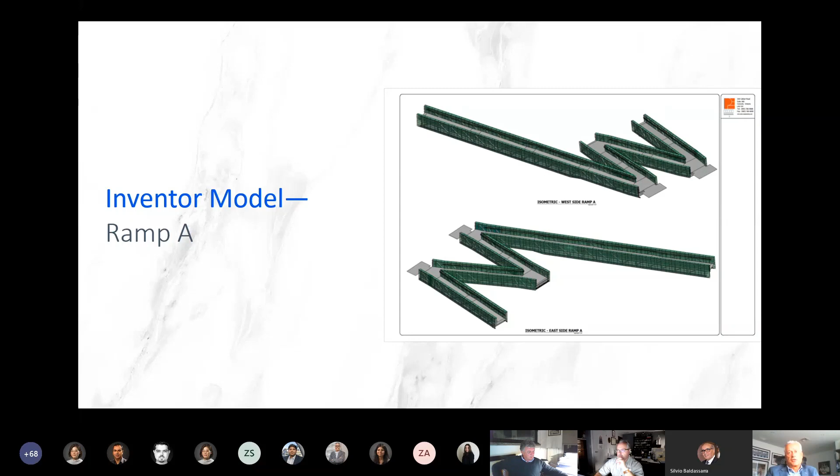We did any conflict resolution, everything was vetted at that point. And if there were any issues, we were able to identify them very early in the process and work through them. Here's the challenge that we came up with on light replacement.

Every coping and every panel on the top was designed as a removable connection. So we drilled these little holes, designed a socket head cap screw with an Allen key that could remove this connection up here. So you can go through here with an Allen key, undo the connection, lift this up, and rotate the panel out for light replacement.

Again, also part of being involved with the whole process, we actually used our stone connections to anchor the railing as well. So we integrated all the spacing of these with our stone jointing, because it did vary, because the panels varied in length. So we worked closely with the miscellaneous metal contractors on their connections and coordinated all the anchors back through our stone. We created little recesses here in the stone joints to allow that to go through.

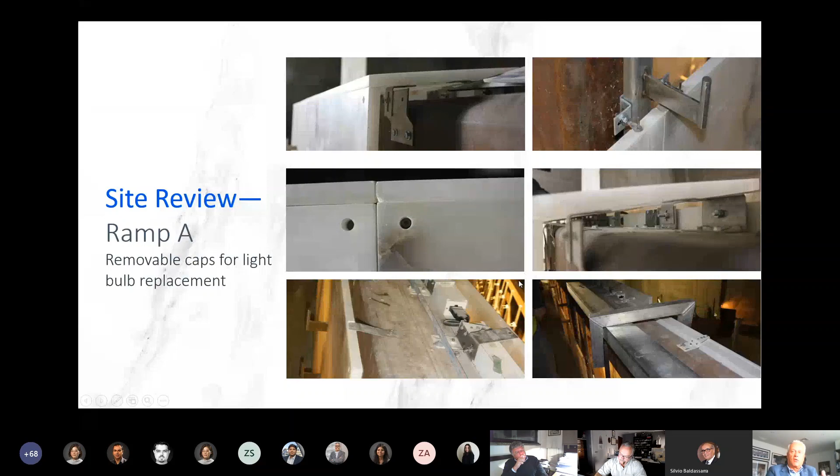So a lot, very, very complex, but the job went smoothly because all the critical stakeholders were part of the process. Another great job we worked on. This is the first permanent memorial at the United Nations in New York. Worked with Rodney Leon Architects. We worked with the steel fabricators. We used CATIA as a modeling tool.

So you can see here the steel fabricator gave the main structure, which is the blue or the grayish light gray material. All the dark gray is all the supplementary steel that we told the fabricator we're going to need you to supplement in order to facilitate our installation. So we modeled it all up, gave it back to the fabricator. They were able to fabricate all the parts right off our model, and the execution was fantastic.

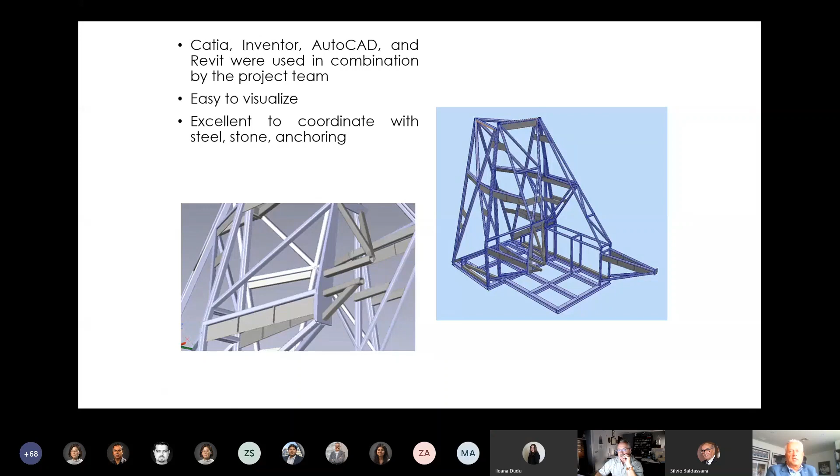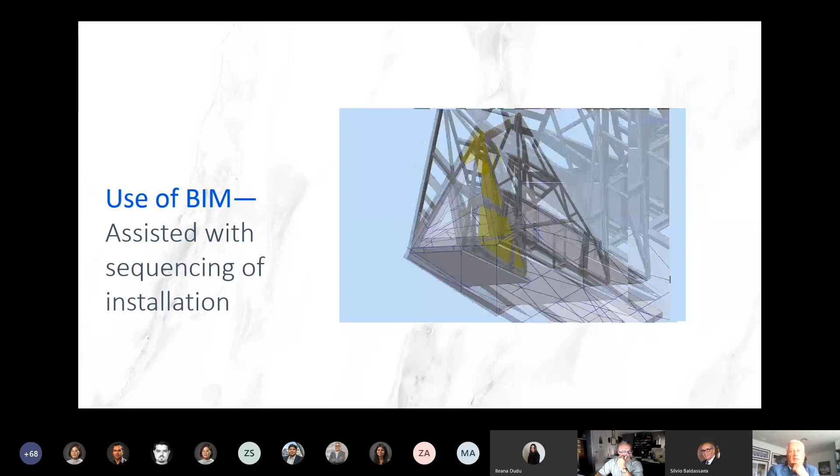The other critical thing, because of the geometry of this, was the sequence of the installation. This was a project that for the most part had all blind connections, because this whole structure was going to be encapsulated in stone, and you can actually walk through the middle of it. So what we did for the installers, we created an animation sequence for them, and one by one, we told them which stones have to go in what sequence in order to aid the installation and allow them access to all the connections. So we color coded and gave them the sequence of all the installation right to the end.

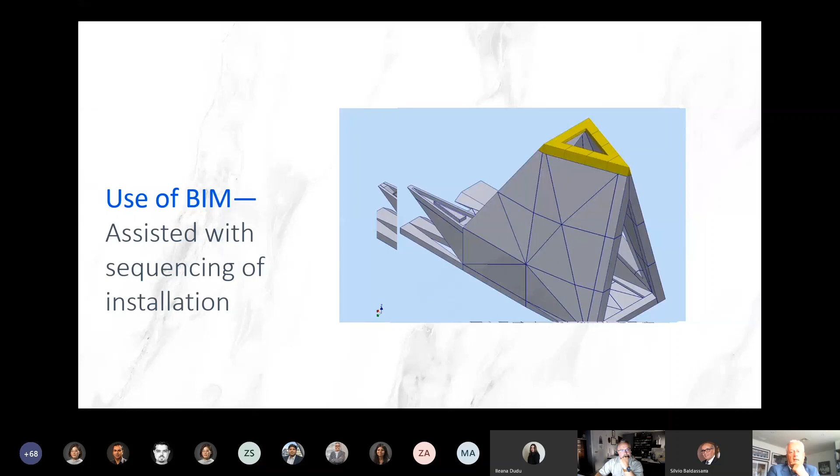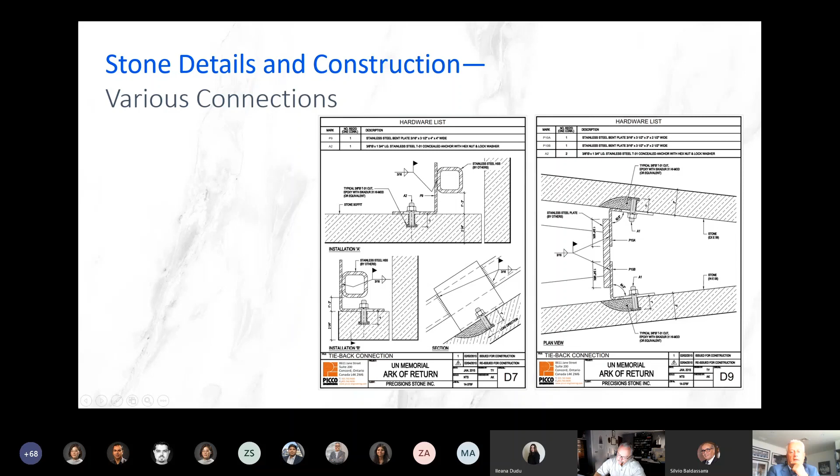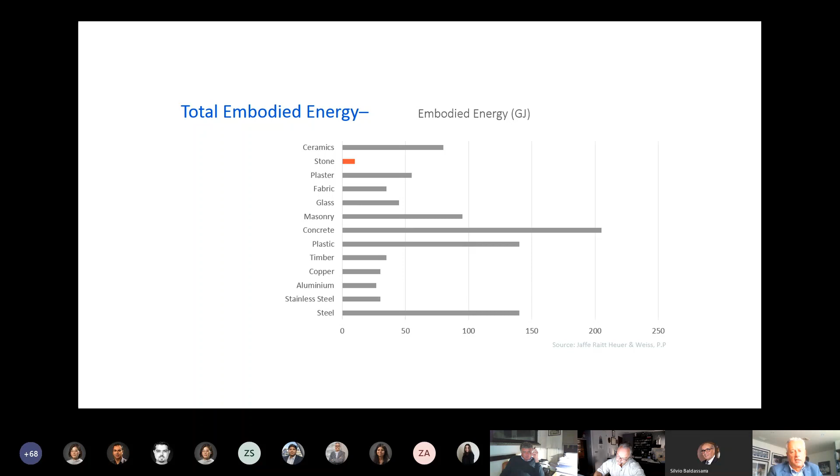And this is just a chart. And we can explain why that's the way it is. When we look at energy consumption in the whole stone process compared to other building materials that have heavy manufacturing, high heat, molten, steel fabrication, aluminum fabrication, glass, and the amount of energy that goes into the fabrication compared to the stone process, really the biggest energy consumption is transportation, because the amount of energy required to drive a wire saw or a diamond blade is really quite minimal when you compare to heavy manufacturing and a lot of other industries.

Transportation from quarry to processor, very often this is at the same location or very close. Transportation to fabrication can be very often overseas or to another location, and then it needs to get to the job site depending on where it is. But any other building material also has the transportation too. So when you compare the actual energy required to fabricate and get the material onto the job site, the amount of energy is really quite low. And then we all know, stone can be repurposed, recycled, reused.

Very often historical buildings are dismantled and reassembled. So a good stone can last forever. So that's in conclusion to the webinar today. I've covered a lot. I hope I didn't go too fast, but I'll open it up to questions or comments.